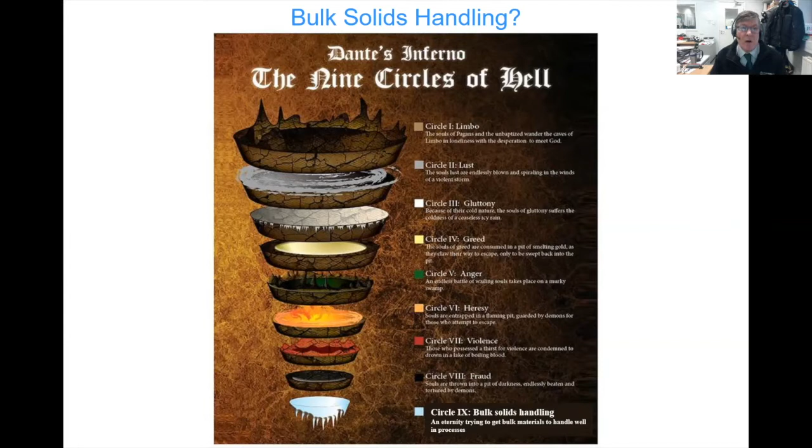And of course, when problems are arising with handling of materials or trying to get materials to flow out of equipment, normally you'll find it's quite easy to pick out where those problems are developing. This is a common scenario in industry, where we can see a vessel that hasn't been flowing particularly well, and the operators have chosen to give it a little bit of gentle persuasion to get the material to come out. You can find this happening on small vessels right up to silos, with the only difference being that with small equipment, the operators might opt for hammers, whereas as the equipment gets bigger, it's not unusual to find lengths of scaffold pole being applied, or in some extreme cases, believe it or not, front end loaders being used to, inverted commas, nudge the silo.

So in all cases, it doesn't really seem to matter what scale of operation you're running with. The chances are that at some time or another, you're going to run into some sort of issue with either getting the material to come out, or stopping it coming out in some cases, or having a material that, when it comes out, has lumps in it where the material has undergone an early stage of fermentation. Or perhaps you'll find that the material is nominally quite clean at one stage of the discharge, but then becomes progressively more dusty at different times during the discharge.

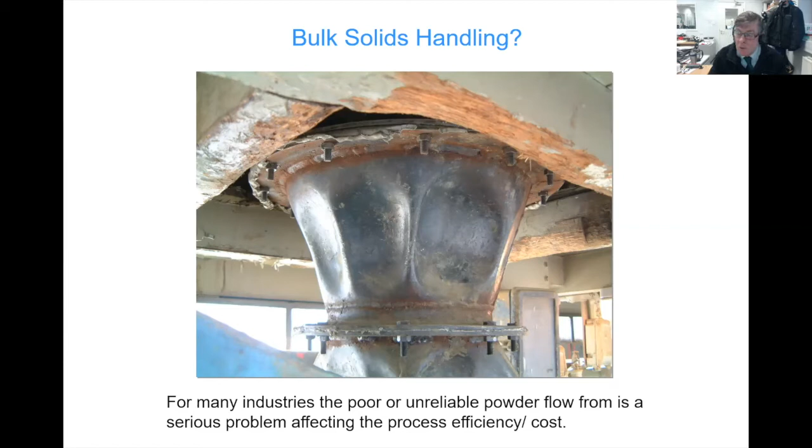So normally things like stores, whether they're buffer stores or storage silos, are merely considered as a means of holding material before you then discharge it. So there's nothing particularly special. It's a funnel with a barrel section on top. What's the big deal? Well, that's what we're going to be looking at.

So, if I talk to plant engineers and I say to them, look, I need to understand more about your process. Can you just sketch out for me how your process works and what goes on within it? The chances are that I'll be presented with a really simple flow diagram like this, where step one might be materials into a process, step two might be sifting or milling, step three might be blending, and step four might be bagging it off into 25 kilogram sacks or into cubic meter big bags, or it might be you're filling a road tanker or whatever.

But essentially, you'll find that when engineers are asked to describe a process, not unreasonably, they think about it in terms of the steps or stages in that process. And of course, when they're doing that, what they're actually describing are the value adding steps of the process. Normally, if you take delivery of a raw material, the whole nature of business is that you'll do something clever with that material to improve its value, and then you sell it into the marketplace or into the supply chain, and make a profit. Sounds pretty obvious, really. So most engineers, even plant designers, have a very solid focus on the pieces of equipment within the process that increase the value of the product.

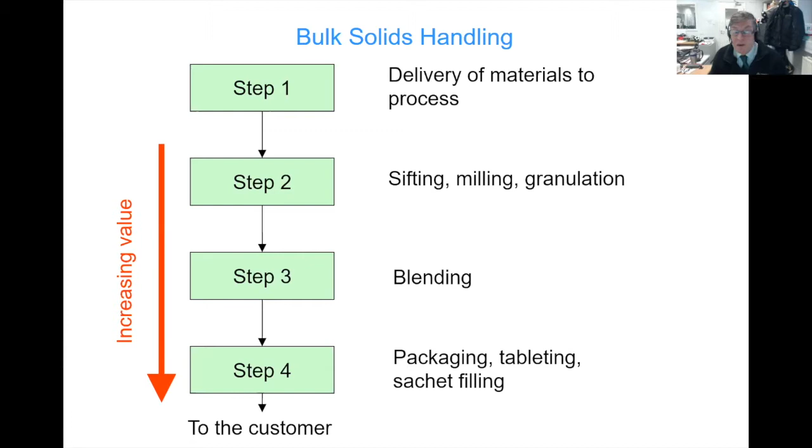Now, at the moment, there's nothing there that's a big surprise to anybody. It stands to reason. That's what engineers are paid to work out. However, what we're covering today is the connecting lines. What the connecting lines actually represent is what we call bulk solids handling. That's where you've got a material being handled in a large quantity. It could be it's going into a buffer store, and then it's being extracted and moved on within the process. So these lines actually are bulk solids handling.

But the problem that industry typically faces, insofar as productivity or wasted materials, is that these are not normally directly associated with the process steps. You'll find that typically the main causes of inefficiency and wastage in process plants come from the bulk solids handling. One of the problems here, of course, is that for most engineers, their understanding and experience of bulk solids handling is largely based on experience gained through their careers. Most engineers have not had the benefit of a formal education in the subject of bulk materials handling.

It means that when equipment is being specified or tendered for, the big unknown is, how's it going to work? And is there actually a payback on investment? Unfortunately, you can't answer either of those questions in most cases. The will it work question is normally dealt with by the process guarantee that anything that you buy is accompanied by. But the payback on investment, you simply can't make that argument or justification because it doesn't add value. So you often find that the bulk materials handling applied into process plants is typically bought down to a price. Because at the end of the day, if everything you're buying has a process guarantee attached to it, then arguably, no matter what you buy, it's risk-free.

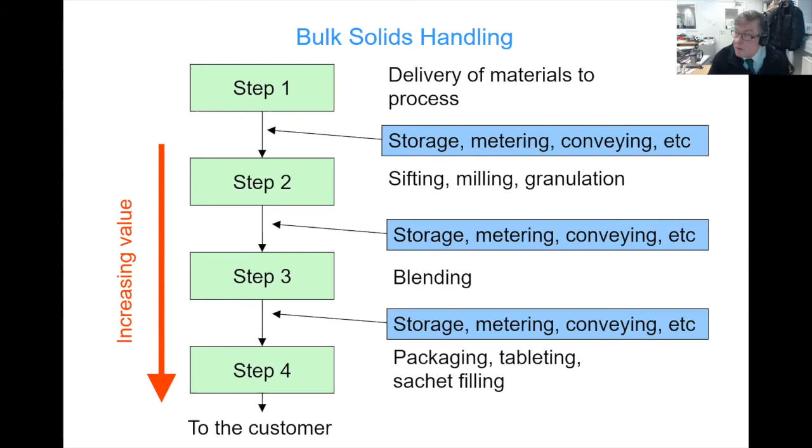So the way to think about this is that virtually everything in bulk solids handling is usually bought down to a price rather than up to a standard. And the consequence of that, of course, is that the money that you save on a piece of equipment is often the benefit that is completely lost in the ongoing operating expenditure to either keep the equipment working or losses through out-of-spec materials. So it's very much a case of you get what you pay for.

But the unfortunate thing is that because bulk solids handling is seen as a subject that no one's really quite sure about, because it's not maths, it's not physics, it's not chemical engineering, it's not mechanical engineering, it's not process engineering, it's a bit of everything. And the consequence of that is that most universities don't touch it as a subject in the context of how industry needs to be informed. So it's very hard to make a good decision with regards to what you're actually buying into.

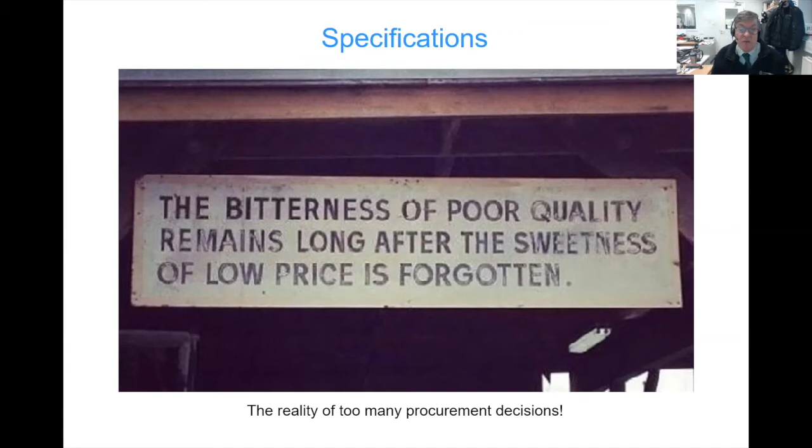So just talking about things at a basic level, because clearly I'm not aware of what your particular backgrounds might be. If we think about liquid inside a container, we can quite easily work out what the pressure is that's acting at any point in that column of water. It's simply rho g h, something that we're all familiar with, because at the end of the day, most engineers have had formal education when it comes to things like fluid dynamics, and that goes across many subjects. So liquids we can understand. In fact, most people understand liquid behavior reasonably well.

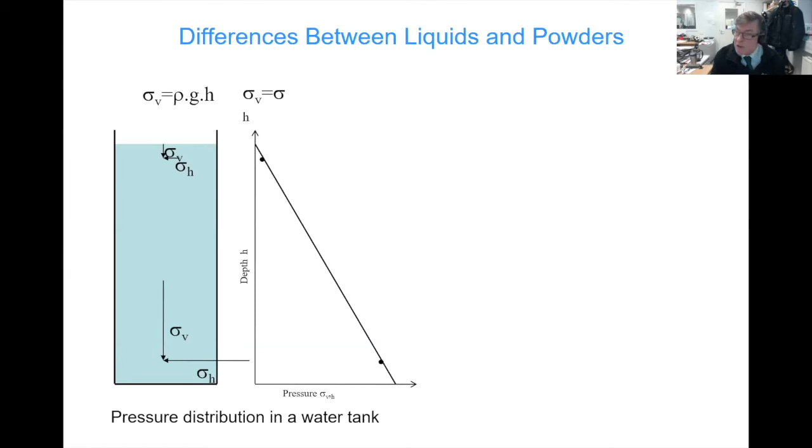Now, where people get into a bit of trouble is when we start to talk about powders or granular materials. Because whereas with a liquid, you've got the density of the liquid and viscosity as your main concerns, when you start to talk about a mass of particles together, you've got internal friction between those particles. So you don't have viscosity, you've got friction. But also you've got friction between the particles and the surfaces that they come into contact with. So if we consider a comparable volume of powder to liquid, and then we look at the stresses acting inside that column, we'll find that it's not linear in any way or form. You've got a pressure distribution like this.

So this is predicted through the Janssen equation. And what this shows you is that the pressure is non-linear, but also that about a third of the total downward load acts sideways. So that's the horizontal load going into the walls, and that's the vertical load acting through the column. So we can see that wall friction has an important role to play insofar as how these powders are going to behave in storage. The greater the wall friction, the greater the amount of load that will be taken away from the base of the silo. And conversely, if it's a very low friction wall, then you'd be increasing the loads at the outlet. And of course, by varying the loads at the outlet, you get into implications for things like the torque and power requirements for, say, an auger feed or something like that.

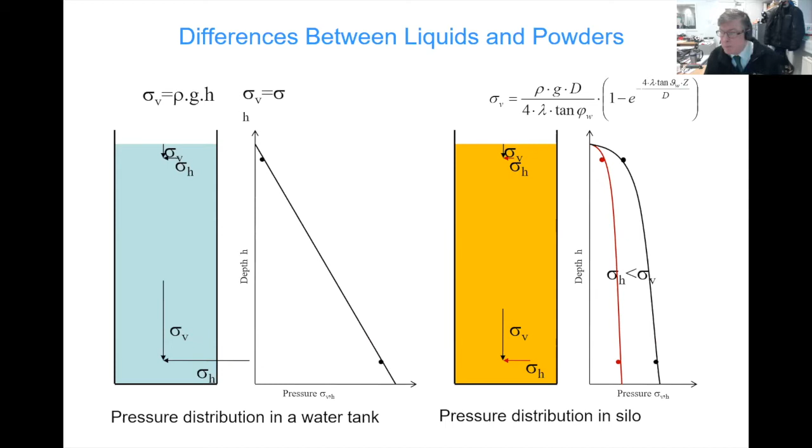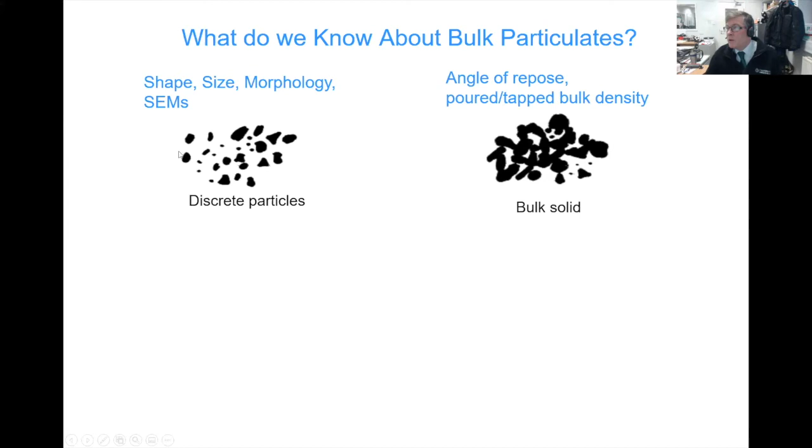So thinking about bulk solids, well, we can look at discrete particles quite easily. We can get the shape, we can get the size, we can get the surface texture. We can take photographs of them. That's all quite easy stuff. When we look at the bulk solids, then we've got to understand how those bulk solids work together. And it's an entirely different behavior than you would think from discrete particles.

So in the bulk form, we've got free flowing particles. So these generally tend to be coarser particle sizes, which have relatively low forces of attraction acting between them. To give you an analogy of this, if I took a handful of granulated sugar, squeezed it into my hand, and then released my grip, then that sugar would drain out between my fingers. So basically, free-flowing materials means you can put a pressure on them. When that pressure comes off, the material goes back to its uncompressed form and it moves freely.

The second form is where we have cohesion. This is where we're now down to finer particle sizes where the forces of attraction are stronger between them. So now instead of thinking about granulated sugar, we'll talk about icing sugar. Get a handful, squeeze it really hard, release that grip. Some of the sugar runs off between our fingers, but often you'll be left with a little lump in the palm of your hand. So cohesive materials, when they have a stress applied to them, actually change their characteristic. They gain strength from having a stress applied to them. So fundamentally very different behaviors, but they're all bulk particulate materials.

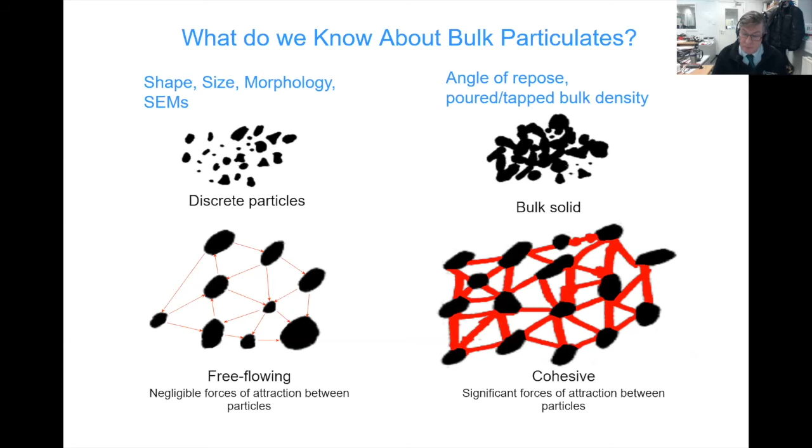So you would think the equipment you handle these through would look quite different. However, if we just have a quick look around the internet, and these are some pictures I pulled off a couple of months back, let's just look at something as simple as the shape of the cone on a vessel. So here's a cone, 60-degree cone. So it's 60 degrees measured from the vertical. Let's see what else we can find.

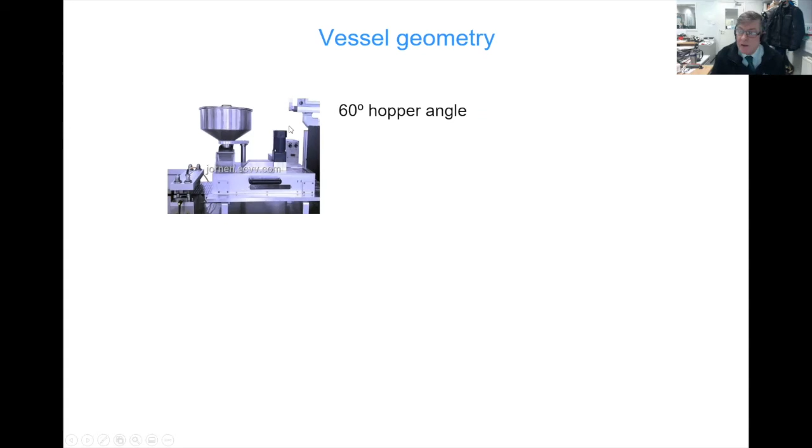Oh, here we go. 45-degree cone from the vertical. Look a bit further. 30-degree cone from the vertical. And essentially, with those three geometries, that's pretty much the range you'll ever be offered for anything.

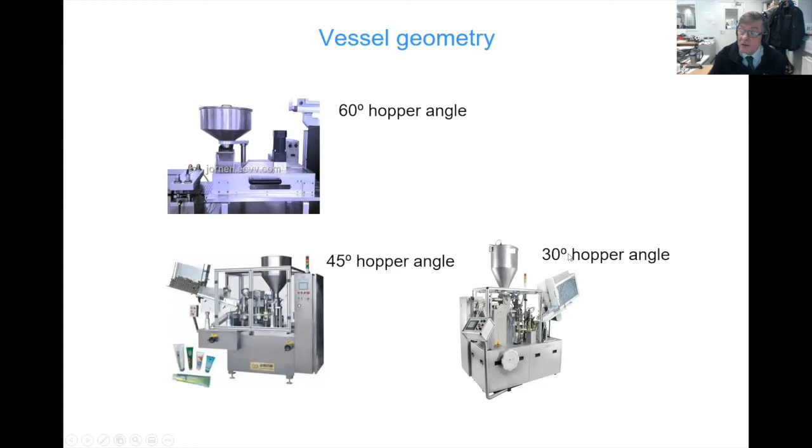Now, at this point, were we face to face, I'd say to you, well, where do you think those angles come from? And I hope I'd get a range of probably overthought answers that are quite intelligent. And unfortunately, you'd all be wrong. The geometry that you see there, and the clue actually is in the angles that are picked, lies in how draftsmen used to make drawings, which is with a 30-60 set square or a 45-degree set square.

So a lot of the none too cheap equipment you're buying actually has its geometry based on a set square with absolutely no consideration at all for the materials that you're working with. And that is a major problem. And this is where a huge proportion of industrial problems come from, is simply the fact that the equipment doesn't bear any consideration at all for what you're going to put in it.

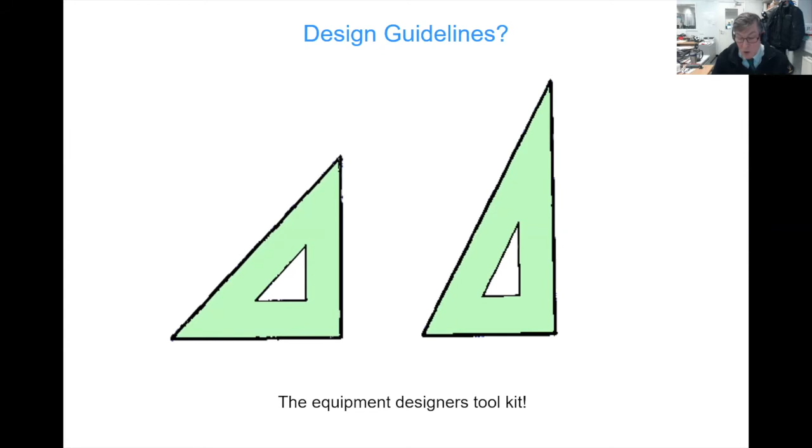So the consequence of this is that when you come to discharge equipment, in this case we're showing a conical vessel, if it hasn't been designed for the material, but has simply been built to a standard geometry, you'll find that the flow channel will tend to propagate up from the outlet, interface with the top surface, and then material from the periphery starts to drain down. So in effect, what you've enforced there is a first in, last out stock rotation.

Now, clearly, if you're talking about the storage and discharge of a harvest, that's not too much of a problem because you'd be draining this down to empty. So ultimately, it all comes out. Where it's a problem is if you've got a vessel as part of a process and you're topping it up before it drains down, so you don't make the process run dry. And of course, by doing that, it guarantees that the material down here is in there for a very long time indeed, which gives it plenty of opportunity to start to ferment or to form agglomerates or adhere onto the convergence of the bin.

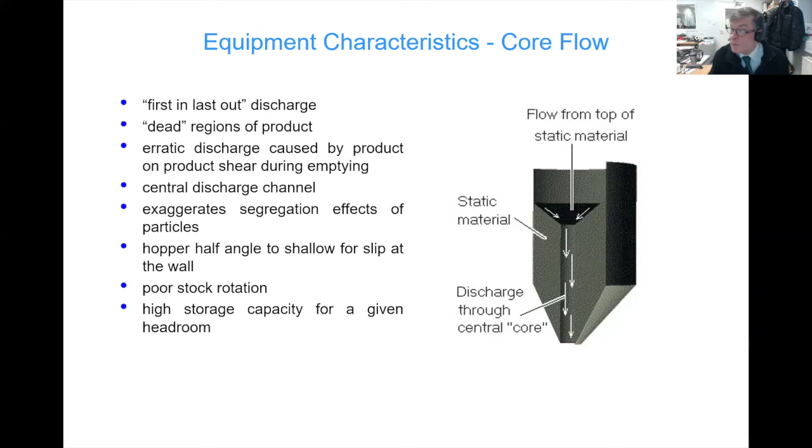But to apply it as a blanket condition across all types of handling operations is where the problems come from. Because for some materials, an operating state is totally unsuitable. So common flow stoppages, mechanical arching, this is simply where the outlet is undersized. Normally, to avoid mechanical arching, it's something you would associate more with aggregates than agricultural products. But generally speaking, it means that the outlet needs to be 6 to 8 times the diameter of the largest particle size you'd expect to arrive at the outlet. It's a fairly easy one to design away without knowing too much about the materials.

But cohesive arching and rat holing are both functions of materials that have a degree of cohesion derived from higher fines content or through segregation effects. So cohesive arching and rat holing need to be designed away by using an understanding of the flow properties of the materials that are going to go through that bin. And both of these are a combined function of inappropriate convergence angle and inadequate outlet size.

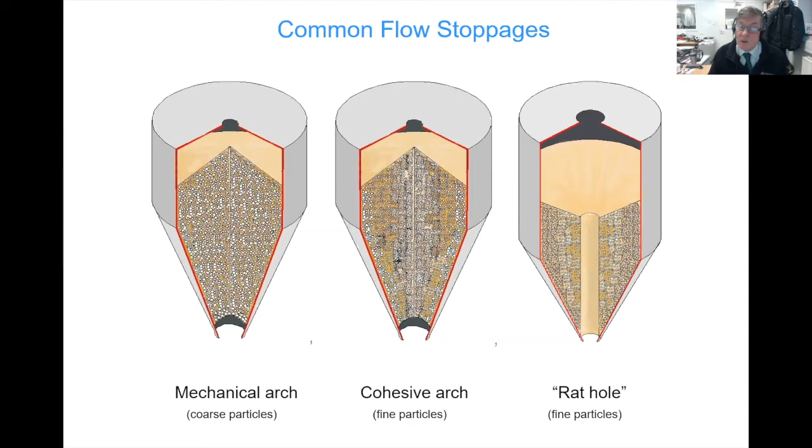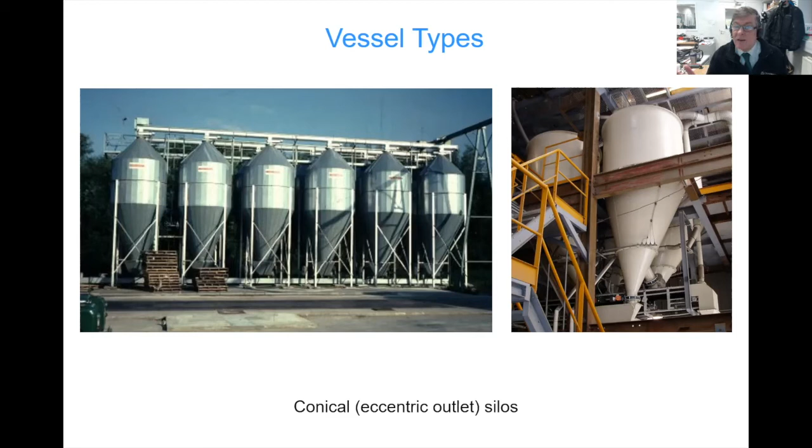But if you use this style of vessel in a process where you're topping it up, then what you'll do on the more shallow angled side of the bin is you'll create a substantial long-term residence period, and you can then reasonably expect to have issues with lumped material coming into the flow channel and cross-contamination. So something to be mindful of. But again, it proves the point that a vessel is not necessarily intrinsically wrong. It all depends how you're going to use it in the process.

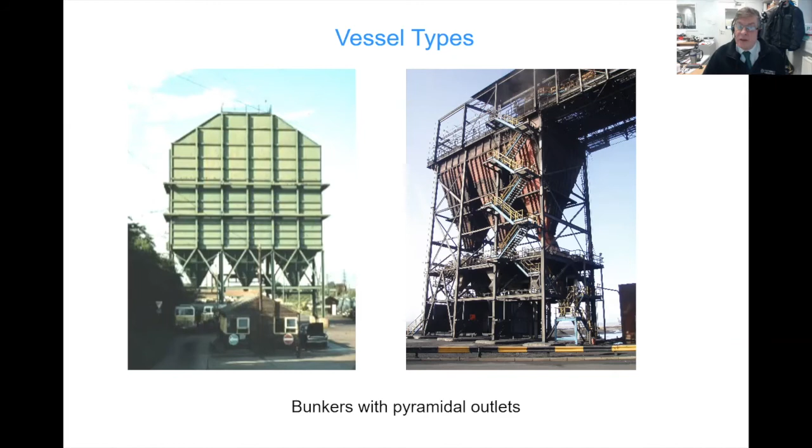But here we can see a steelworks where the material is a lot finer. The flow properties mean that it's more cohesive. And you can see here, we've still got pyramidal outlets, but you can see how dramatically steeper those convergence angles are to try and prevent the material from being held up inside the vessel.

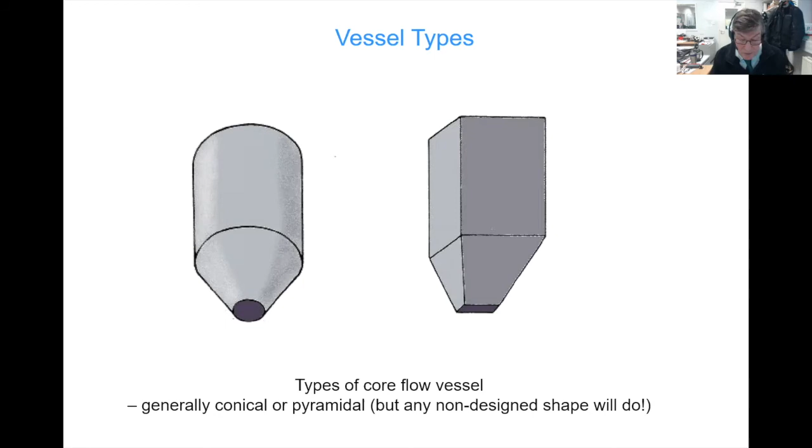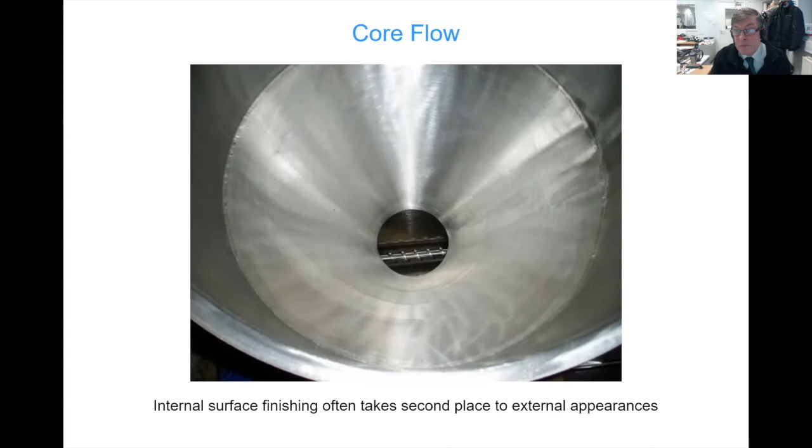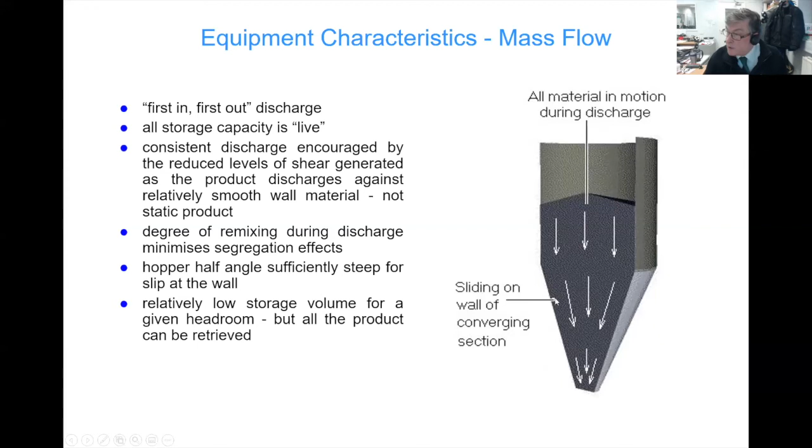So what we really need are bins that can operate on a first in, first out basis. This is known as mass flow, but you can only achieve this geometry by doing flow property measurements and designs based on those flow properties, all of which is outside the scope of what I can cover today. Hopefully I'll get invited back and we can talk about that some other time. So mass flow gives you first in, first out. Obviously no stock, no contamination between batches. It's got a lot going for it.

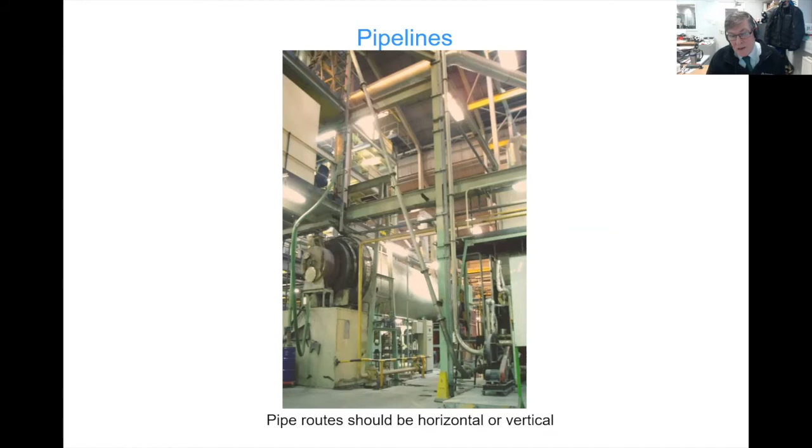And of course, the way that people get around this is to try and put more air through the pipeline so it doesn't block, without understanding that actually it's the pipeline layout that's the key problem. So clearly more air means more velocity. And if we have more velocity, then we get higher velocity impacts between the particles and the bends, and we get more breakage. And this breakage could be as dramatic as the complete destruction of grain, or it could be something like delaminating the husk off.

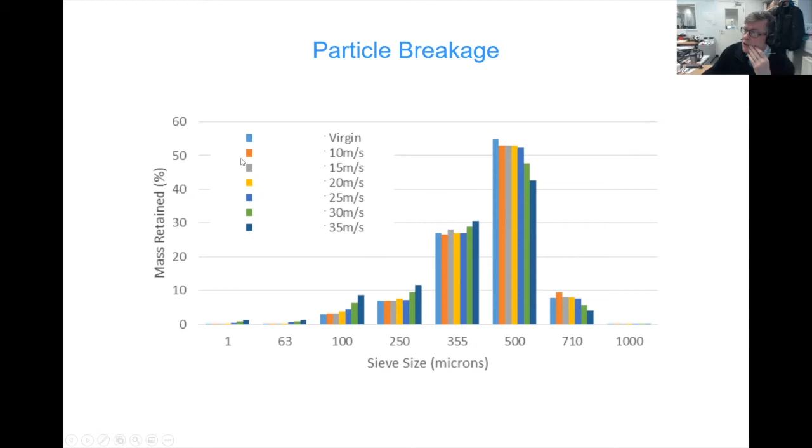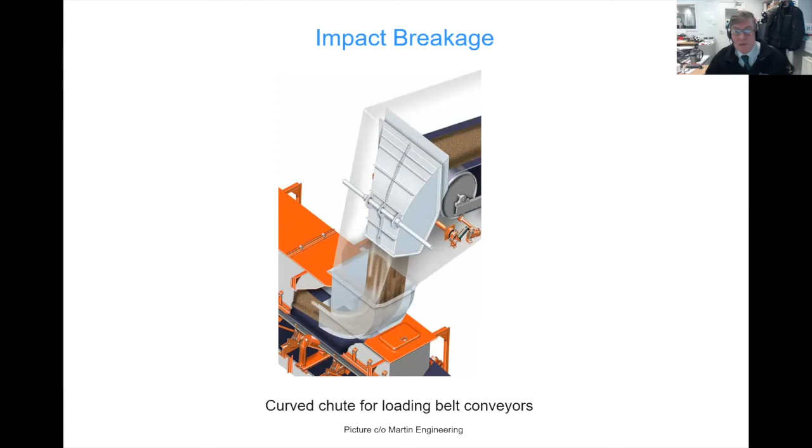But also you can get breakage through inappropriate transfer chute design. So here we've got an example of a transfer chute coming onto a cross belt down the bottom here. And you can see what we've got here is what's known as a hood and spoon. So the hood intercepts the trajectory of material coming off the top belt, focuses it down, and introduces it into the spoon section, which then lays it onto the transport belt. And this is a way of minimizing impact damage, but also it's a way of trying to contain dust into the product so you don't get huge dust handling problems at transfer points.

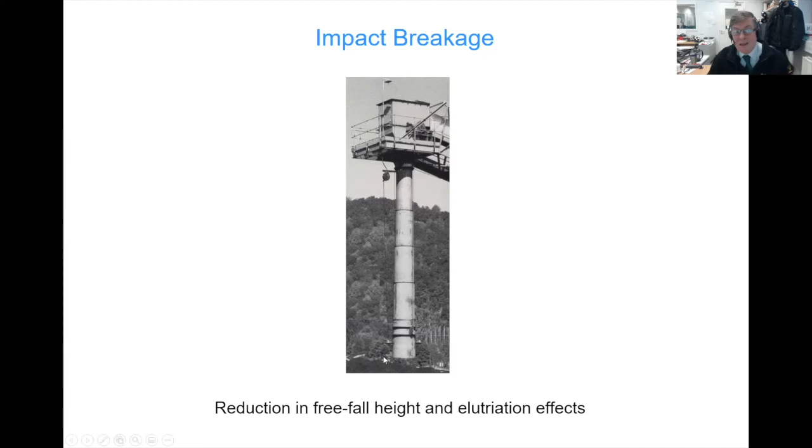Also, free fall breakage height. Free fall breakage can be a problem. So here we've got a telescopic loading chute. Clearly this is for an open stockpile, but the principle is interesting in that the chute is fully extended to the ground level. Material backs up, so you've got a conveyor belt up the top here, backs up to a high level, and then the chute is slowly retracted. The material spills out the base while the free fall height is contained within the upper part of the telescopic chute. So again, you're controlling breakage, but also importantly, you're controlling dust emissions by keeping the dust wholly in amongst the bulk.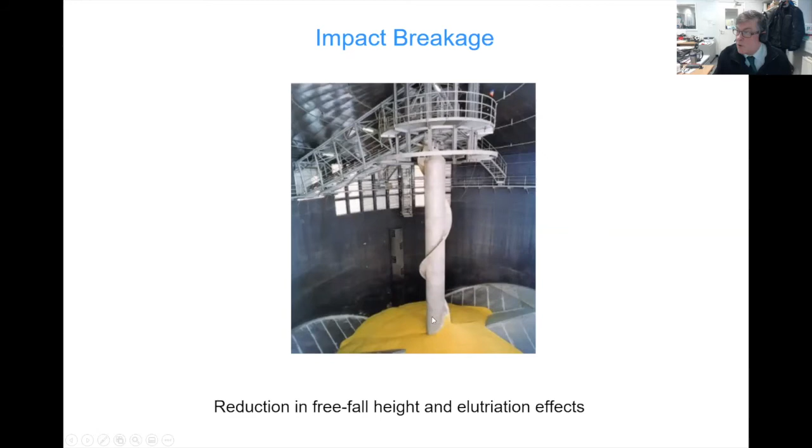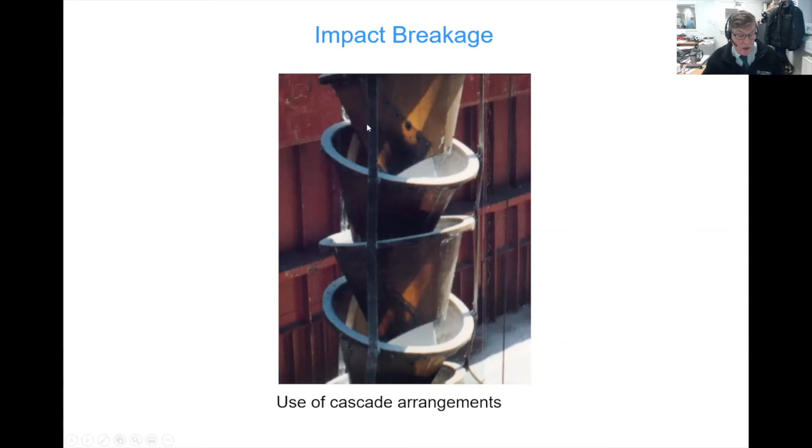Same sort of thing here, helter-skelter loading chute. Same thing again, we're bringing the material down in a high density condition to try and keep the fines in with the coarse. Cascading bucket arrangement, same sort of objective, a dense flow rather than a waterfall of material going in, in this case, the ship hold. But equally, if you were loading into a flat store, this would be something that could be of interest.

Segregation, very much a problem with a lot of material, particularly once it becomes degraded. So in this case, we've got a bin that's been filled centrally. This could just as easily be a stockpile on the floor, by the way. And what you'll find is that the finer, less mobile material tends to concentrate under the fill point, and you get an absence of that content at the periphery. So this could be the edge of a heap on the floor, or it could be a region, as shown here, constrained within a storage vessel. But basically, you've got a lack of homogeneity from the center line to the outside.

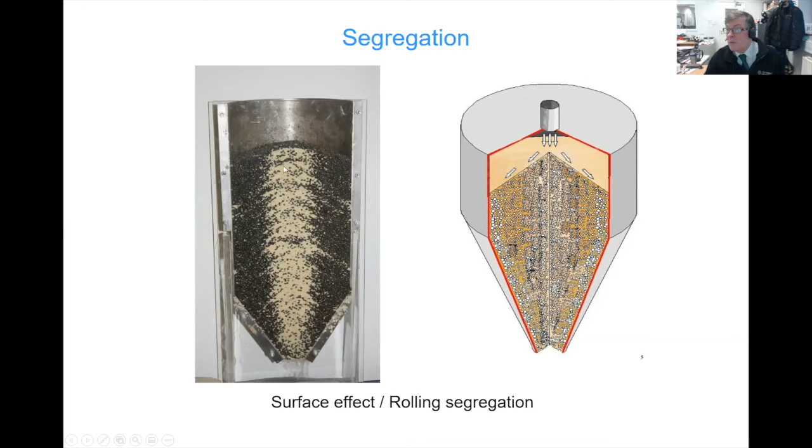Loading in pneumatically, we get material contacting on the inside surface of the bin. Deceleration through friction, which then means you get an inward heap formation, whereby fines now dominate the outside, coarse now dominates the center line.

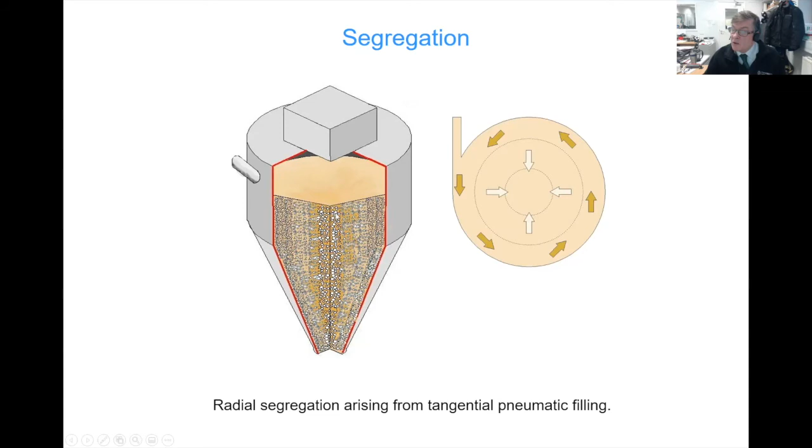Loading vertically downwards into bins, so it's a sort of thing you often find with external silos loaded by road tankers. Very normal that you get a high velocity gas flow down through the loading pipe, interacting with the bulk solid, and then that gives you a high level of turbulence in the headspace, which then particles settle out according to their settling velocity, and you end up with a fines enriched crust on the top surface. Clearly, if this is an external silo and you've got high humidity developing in there, you've got a high surface availability to absorb humidity, and then of course you can run the risks of a crust formation.

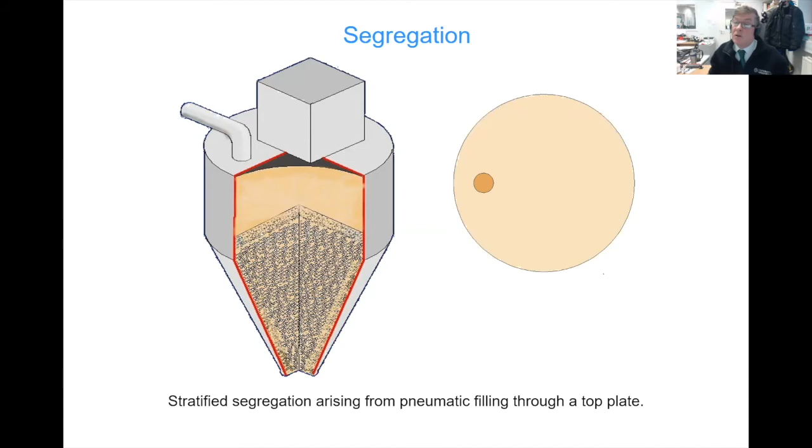Loading in across a bin. Here we've got material loading in. Bear in mind the entry velocity here is going to probably be about 26, 28 meters a second. Impacting on the opposite side of the bin, falling back under the load point, and now we've got a very long angle of repose with high fines on the impact face and high coarse under the loading point. So you can see something as simple as putting the material into a silo has an enormous influence over how that material is deposited.

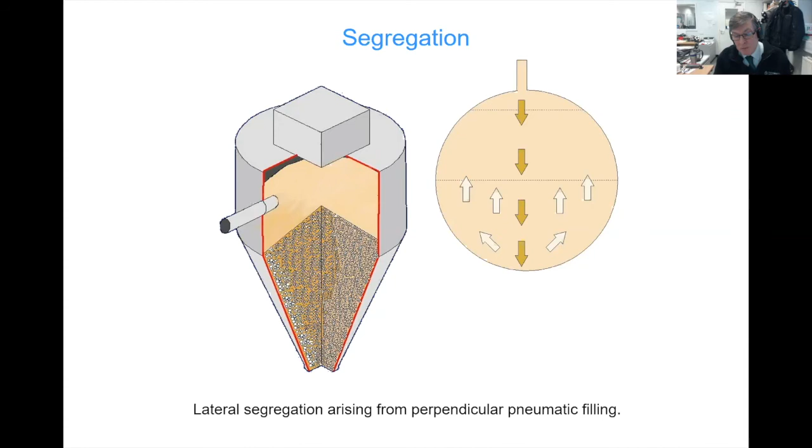And if we then think backwards to this central flow channel business, you can now start to understand why that central channel pulls out different regions of materials at different stages during its discharge. So some people try to minimize these effects. So here's a gravity fill with a distributing cap. The idea being the material falls onto the cap and you get a double angle of repose. So by shortening the length of the slope, you reduce the segregation to an extent. In theory, this is how it works.

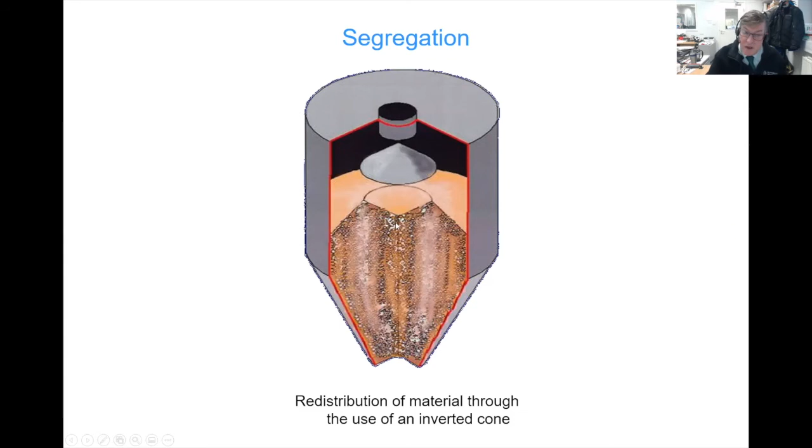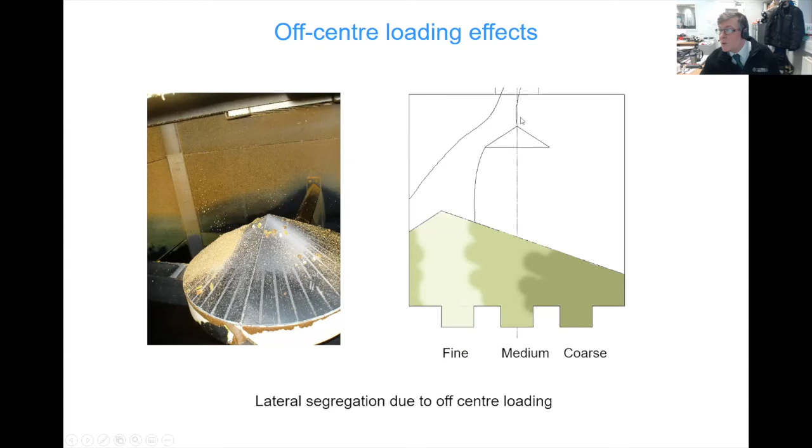Coming towards the end now, this is just another example of segregation where we've got a rotary valve up here, diverter, two bins packing out material. One bin had a much worse segregation than the other. The client couldn't work out what on earth was going on there. But of course, if you look at the system, you can see that material coming down the duct and passing across to this direction barely decelerates at all. So you get a very strong trajectory at this point, pushing material off to one side. So you've got stronger fines this side, stronger coarse that side.

But of course, with the diverter in the opposite direction, you get impact deceleration, loss of energy, and thereby the trajectory effect is much reduced. So you don't get as severe segregation. Simply a function of the way that the chutes are laid in. But again, because in industry, often the bulk handling equipment is just laid in as a connect this piece of kit to that bit of kit, and there's not much thought given beyond that. That's where a lot of these problems come from.

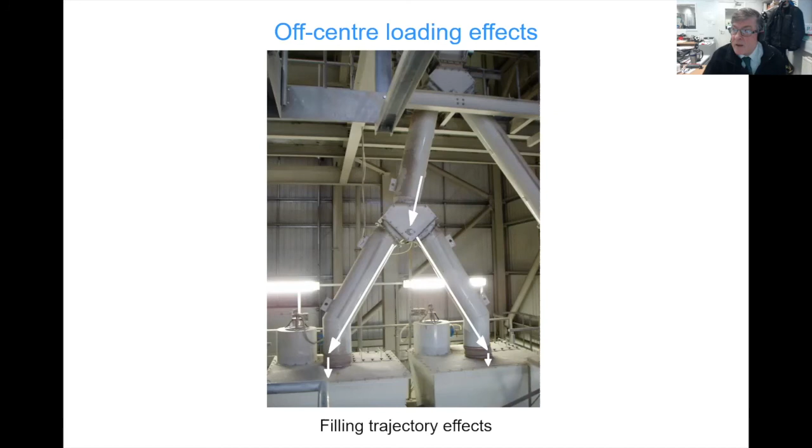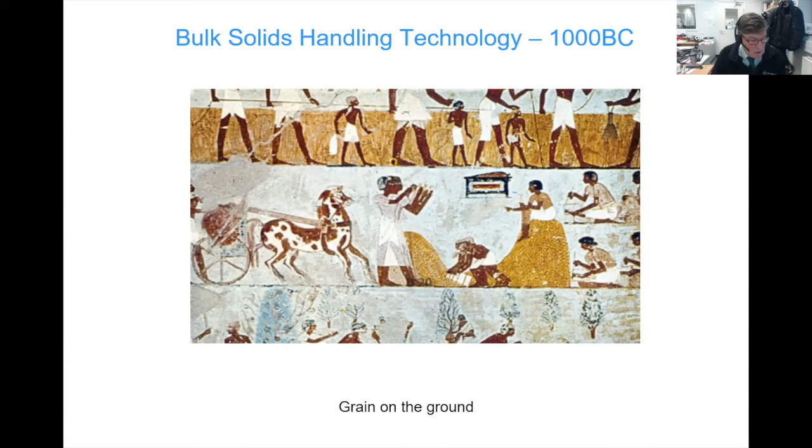So I think I need to be wrapping up now. So my parting comments to you are going to be that, if we look back in time to the time of the Egyptians, and in this painting, we can see people working with grain that's stored on the ground. This is the way that it was dealt with back in Egypt. So that's 1000 BC. And just to prove to people that not much changes in this world, really. Here we are, 2000 AD, and we're still working with grain on the ground. In this case, it's because the structural loadings on this bin hadn't been correctly assessed for the material that's being stored, and it just simply ruptured itself.

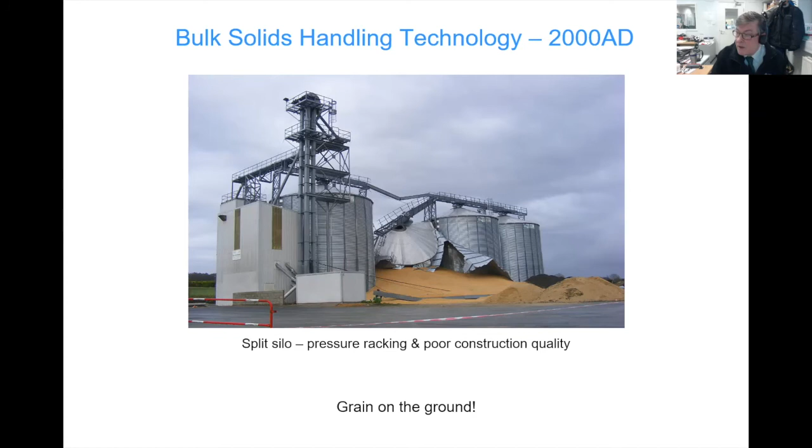So in closing then, many bulk solids problems, whether it's discharge, whether it's spoiling, whether it's deblending, are a result of the use of standard designs of construction, standard designs of equipment, which actually aren't optimized for anything, but also handling systems that are also not very well set up either. And these are usually due to a very tightly controlled and restrictive capex allocation for purchasing the equipment. So again, usually the cheapest equipment tends to win through.

Key problems that affect not just the agricultural sector, but all sorts of sectors, things like wear, lump formation, particle breakage, segregation, discharge reliability, material hang up inside vessels. I mean, there's a lot more I could add to that list, but they're the most typical ones.

And hopefully the parting ray of hope I can give you is that there is no black magic to solving bulk solids problems. You know, equipment suppliers might make out to you that actually the only way you can deal with this problem is to buy their most recently available aeration panel, vibration panel, pneumatic hammer, or whatever. Discharge aids don't deal with the problem. They're like sticking plasters. They don't deal with the problem.

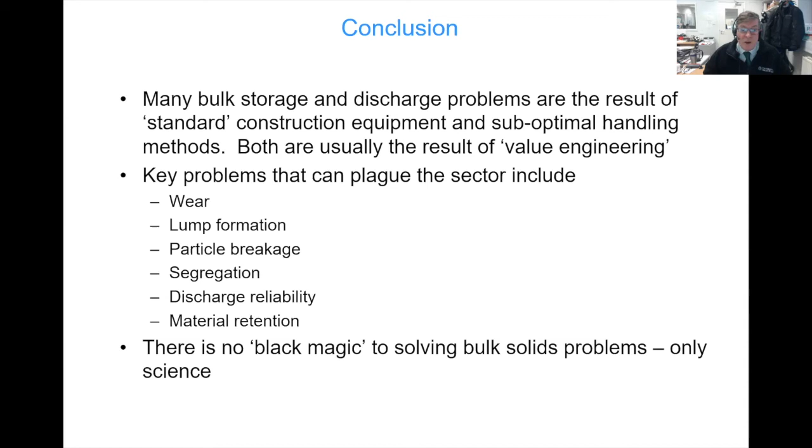But the techniques have been in place since the early 1960s to predict the storage and discharge behavior of bulk materials. So to be honest with you, the only barrier to adopting best practice, I would argue, is actually an awareness of what best practice actually is. And hopefully this presentation just gave you a very quick snapshot of maybe some things that you may not have been aware of, but I hope you found it useful.

Thank you very much, Richard.

So there's a question from me to start with, and the second question is similar as well. So my question is about CFD. CFD analysis is used in fluids and airflow. Is it also used in bulk solids? Obviously, the big variable is the particle size and the shape.

Well, at this point in time, with computing power as it is, there are very useful applications of different sorts of CFD type projects, and discrete element modeling and this sort of thing are used very successfully to deal with things like transfer chute design. So you'll find that a lot of companies use DEM to model transfer chutes for bulk handling systems. But with regards to actually predicting the storage and discharge behavior, it's still a very, very long way off yet.